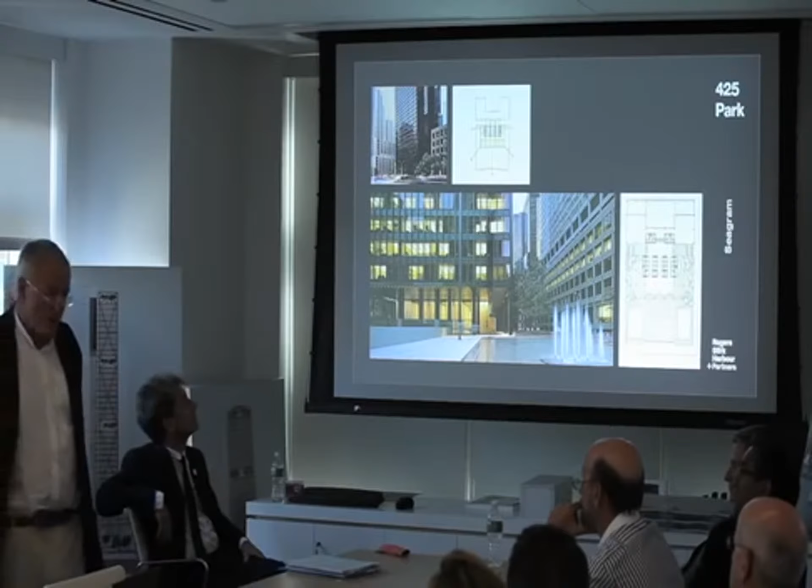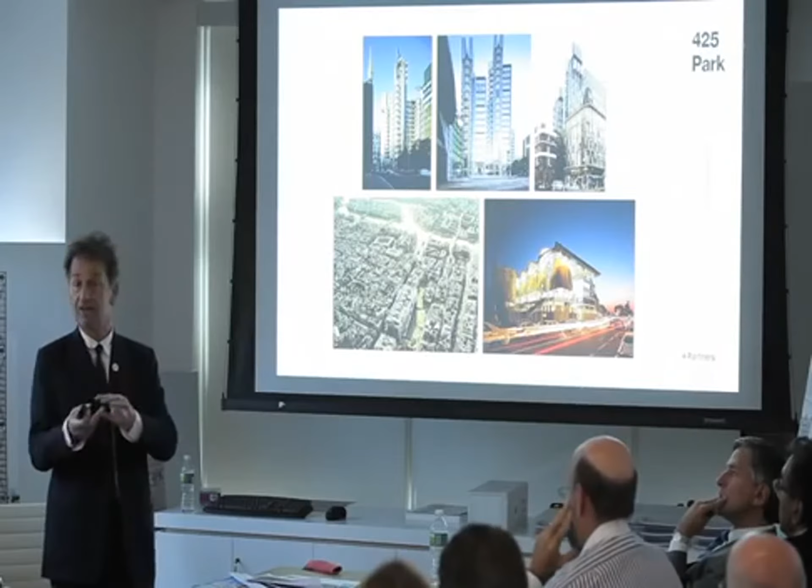City and context is a very strong driver in all of the buildings that we've approached. It's our understanding of some of the existing conditions, the physical topography, the cultural and political aspirations of areas across the world that we need to work within. It's very important that we begin to attempt to understand that. The responses will always be slightly different, but each time they can be rooted either through harmony or contrast to their existing setting.

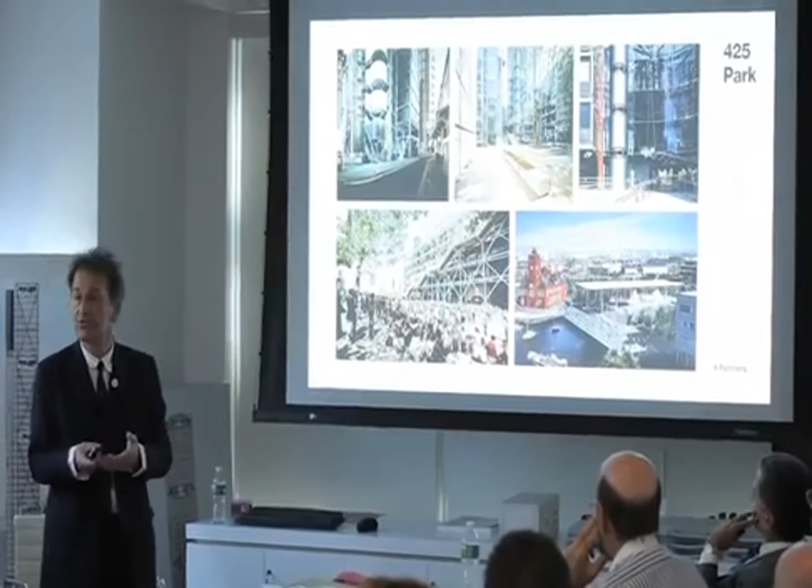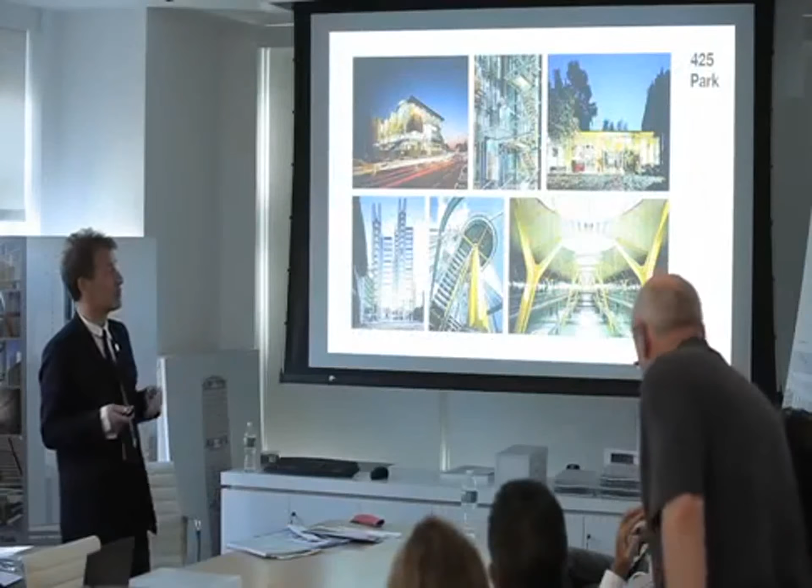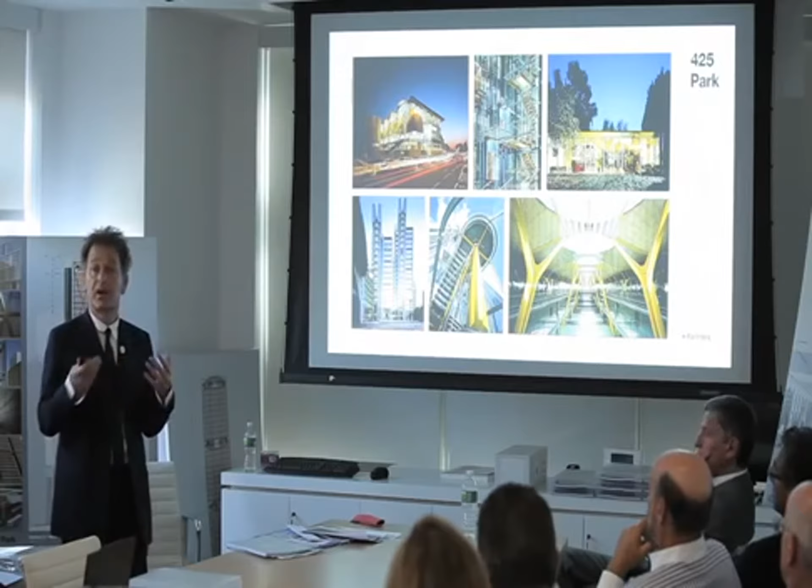This is what I tend to call public realm, which is we have a responsibility to those people that use buildings, but also to those people that don't use buildings, passers-by, people where these buildings have a profound impact on public realm. We're quite interested in a term legibility. What are buildings trying to say? There's a great deal of discussion about what is a statement that a building is making, but in many instances just the basic components of what makes a building work are spectacular. They're things that constitute what we believe is a modern architectural language, which is really a celebration of all of the things that are required to make that building work, celebrating them in an appropriate way.

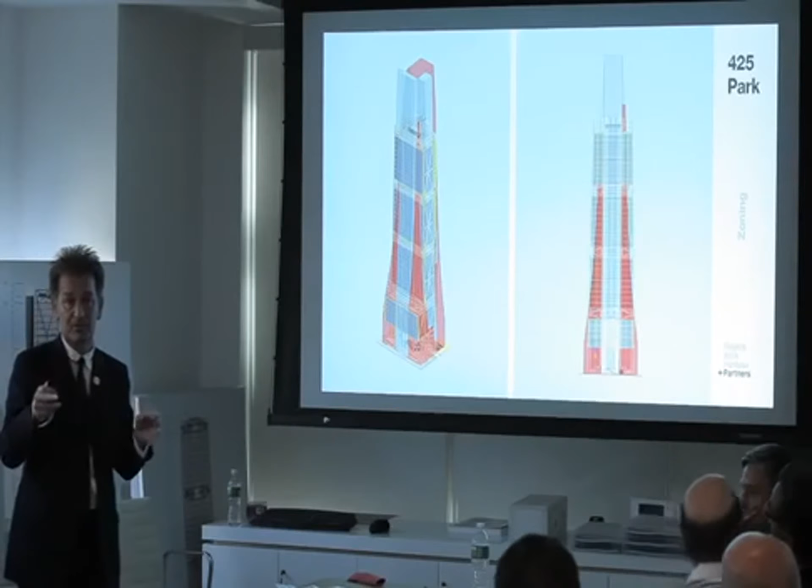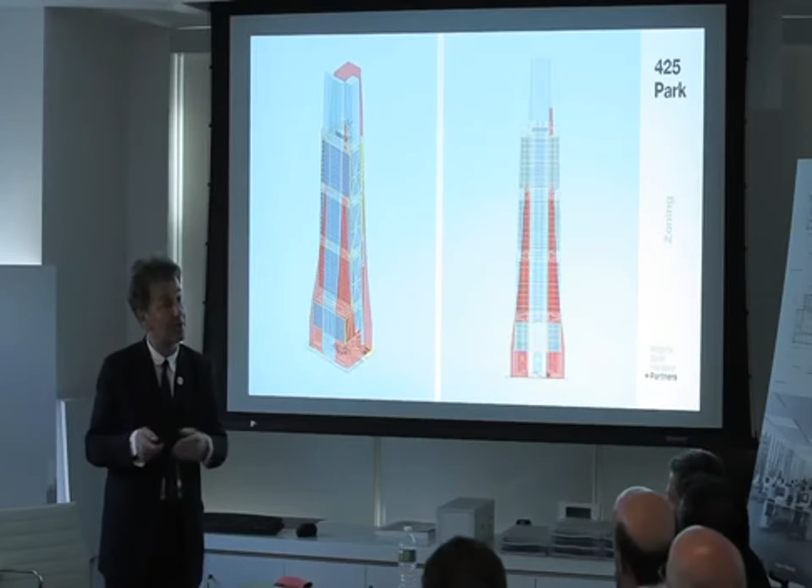What we've shown here is a three-dimensional interpretation of maybe not doing a wedding cake, which is structurally quite difficult - awkward, difficult to stabilise. And to create something which begins to exploit those middle thirds in the central section and pick up some of the street wall, and begin to define a boundary that Richard suggested has other possibilities of how it might make that relationship to Park Avenue. And you can see this slight leaning.

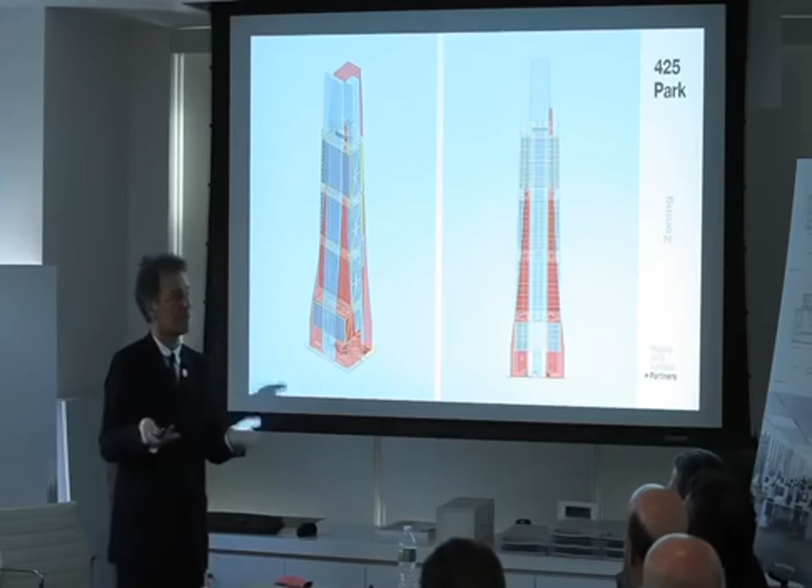We're desperate to try and make it feel like one building that isn't sat on a funny suitcase, that it's something you can feel - it looks the same because it's the same cladding, but it's not really the same spirit of what's above.

As part of our presentation for two schemes, which you suggested, we felt there was one approach, but the retention of 25% of the existing, which is as-of-right development, is really affected within this area and affects its relationship to the public space. So I'll take you through those in a moment, but it's defining that edge and then having a very, very simple, systematic

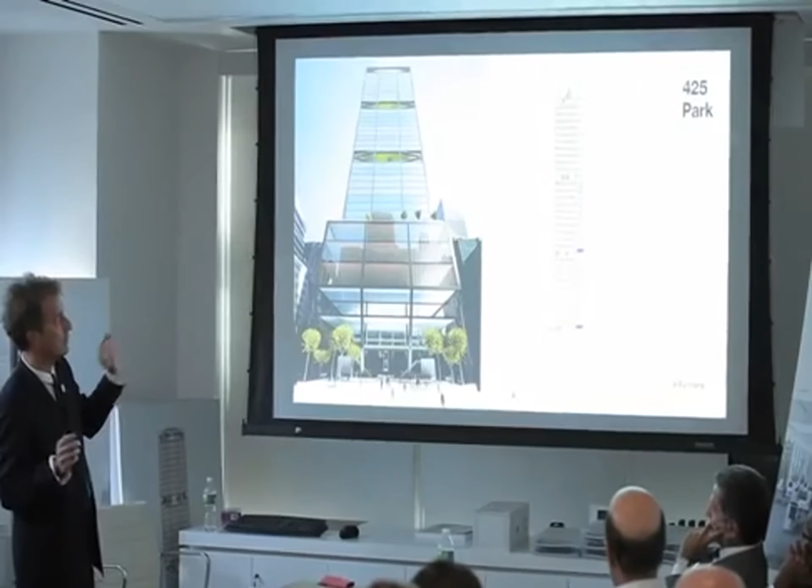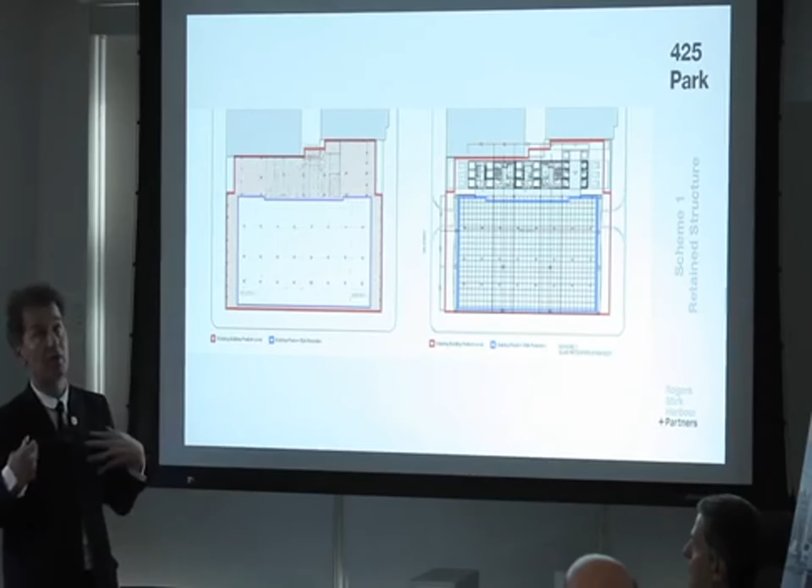flexible floors above. Now these are the two options we're going through - we've got Scheme 1 and Scheme 2, but this first one is the retained scheme. So what this is demonstrating is the existing line of this building is set upon the existing line of the existing core. So you could remove the core and still leave what we call the net area, the rentable slab, in front of it. We still think some of the urban questions related to frontage, maintaining Park Avenue and building up a tall building of whatever height you can negotiate is possible.

But what this suggests is the notion of creating this public space. So everyone's crossing on corners across Park Avenue, and the idea of crossing here and having this thing cut back so that what it's doing is opening its corners to all of the major points of how you actually cross Park Avenue. So these are about the garden spaces you were talking about.

So these again are just our internal - we've built a 3D model of this basically. And I think there's an aspect that it could begin to give something slightly different rather than just another terrace. And what we've suggested is that it would be nice if you developed a theme, whether it's this or something else, something that runs through and informs what all of those roof levels are.

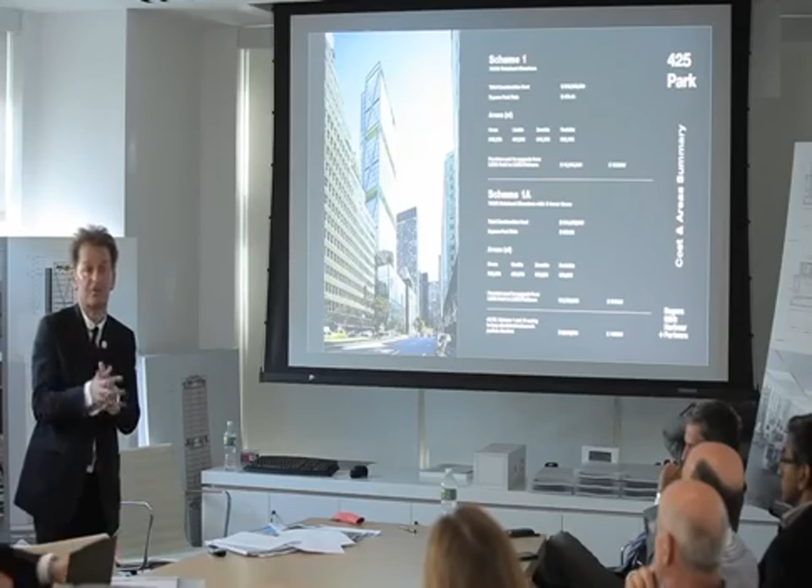I think one of the things that we've tried to do is to highlight some of the issues that perhaps you'll be facing, and also to deal with something which is simple and systematic to build.